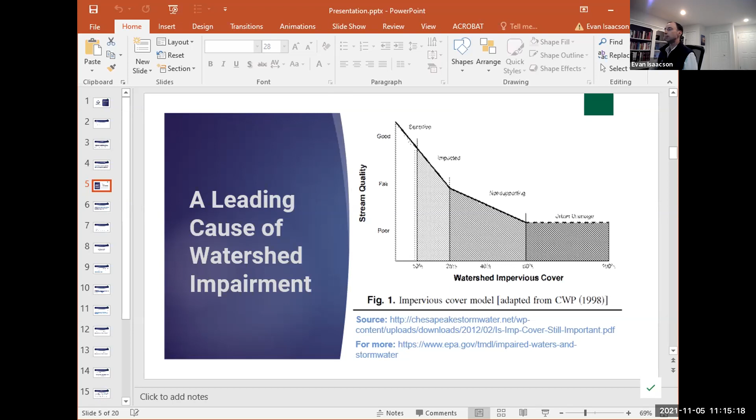And I do want to highly encourage you all to check out the Chesapeake Stormwater Network and Center for Watershed Protection websites. It's a wealth of resources, and the experts there, I'm sure, will be happy to answer any questions you have. They and others have really moved the ball forward on the science and engineering of stormwater management nationwide. But given that they're here in our backyard, I think that really probably helped push Maryland way ahead of many other states as far as inserting water pollution control policies into our MS4 permits.

All right, so I want to talk a little bit about why it's important to impose water quality protections in an MS4 permit. I'm not literally going to be talking about rebranding here. I'm not a marketing expert, but whether you say the acronym MS4, or you spell it out and say municipal separate storm sewer system permit, it's a mouthful and it's boring.

And I'm not even joking. My wife asks me to talk about stormwater when she needs help falling asleep.

We need to talk not so much about what a storm sewer system is or how it's being treated under the Clean Water Act. We need to talk about the impacts of stormwater itself, right? So it's not about a sewer system. It's about the fact that what comes out of that sewer system is completely untreated discharges of pollution. The fact that the impervious surfaces that convey that stormwater lead to flash flooding. The fact that the pollutants in that stormwater are toxic and expose the surrounding communities.

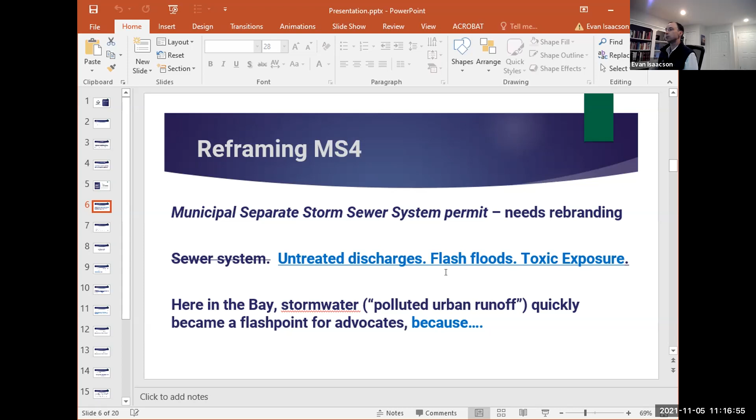So I think one of the lessons we in the Bay community have learned is that the word stormwater doesn't exactly resonate, and whether we rebrand with terms like polluted urban runoff or just think about some of the impacts of stormwater, that has actually helped catalyze focus. I would say stormwater is sort of the hot button issue as far as Bay restoration is concerned. And I'm going to talk in the next slide about why.

So climate change is inextricably linked with stormwater, at least in this region. I assume New Jersey is not very different from Maryland in that fact. Michael said he was jealous we have the Bay TMDL. I would say, don't be too jealous. The TMDL itself hasn't been all that successful. What has been successful and what is really important is that we have a federal appropriation every year for the Chesapeake Bay program, which is chock full of scientists, engineers, modelers, and experts on everything to do with the Chesapeake Bay. And I think in recent years that has really meant to some degree advanced analysis of the impacts of climate change.

Baltimore and Ellicott City in 2018, we saw catastrophic flooding. It made national news. The small town of Ellicott City, a historic town in central Maryland, was devastated by just a wall of water that rushed down the main street, destroying cars, and I believe it killed a few people. Those communities are still rebuilding, and importantly, they're not just rebuilding the way they were, they have received considerable state funds to sort of climate proof.

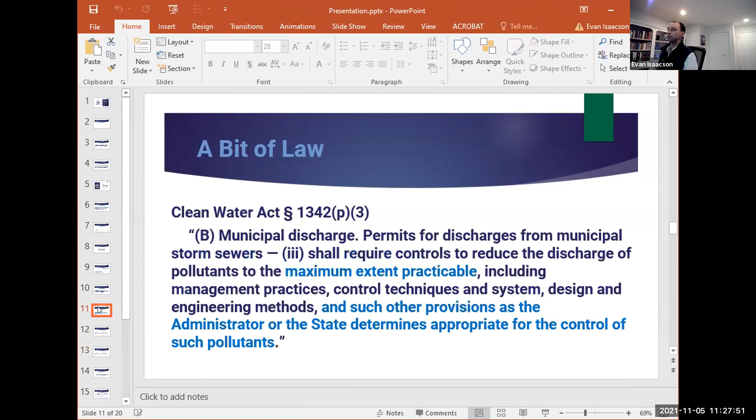So MEP controls this language, and then comma, and such other provisions. So the point here is this: MEP limits what a permitting authority can do, but it only includes those things. Then they also have the discretion, if they so choose, to include such other provisions as is determined appropriate for the control of such pollutants, right? So that is a more lenient standard that says a permitting authority has the discretion, if they so choose, to go beyond the maximum extent practicable.

There are entire journal articles about those commas and about that provision. There are numerous cases, as I mentioned, including 2 in California and 1 here in Maryland. There's actually been several here in Maryland. This is the most recent one. And yes, there are plenty of lawyers that are trying to figure this out.

The bottom line, and I'll end my legal discussion here, is could one compel, let's say an environmental group, could they compel a permitting authority in a state to write an MS4 permit that strictly complies with water quality standards? You know, I can't give a definitive answer and I wouldn't want to try, but based on the limited precedent, based on the arguments that I've seen to date, the answer is probably not. I certainly wouldn't have a lot of confidence in that. MEP acts as a legal ceiling, so you can't compel a state to go beyond MEP.

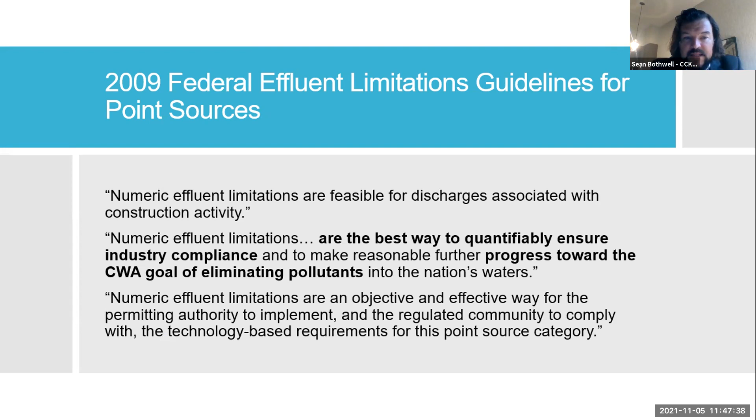And numeric limits aren't any type of new concept. You'll notice this is from 2009 guidelines. These were more focused on construction and industrial facilities, so they have to meet the BCT standard rather than what Evan was discussing, which is the maximum extent practicable. But it's 11 years now that this guidance has been out there, and very few numerics are being put into permits. And again, since 2010, EPA has been advocating and pushing for local permitting authorities to use numeric limits when it's feasible, because it holds people accountable. People know when they're exceeding standards and when they're not.

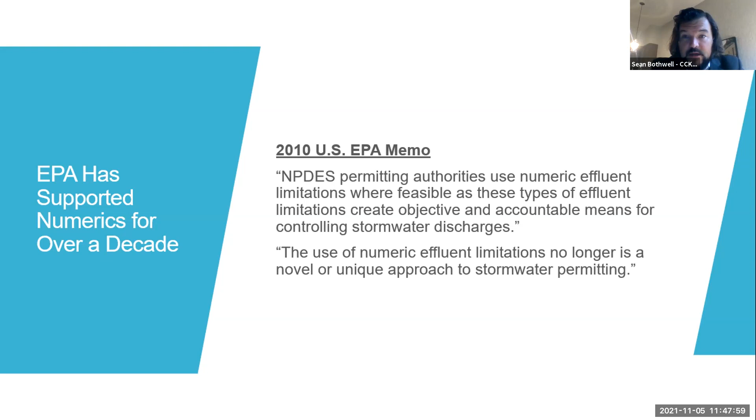So I'm going to get into the 4 case studies now, and I'm going to start with some of the better ones and then move towards some of the TMDL incorporations that aren't really working as well, and it'll hopefully elucidate some best practices, but also some lessons learned as we go through it.

So the industrial stormwater permit was reissued in 2015 in California, but then revised in 2018 to incorporate our TMDLs in California. And we negotiated pretty heavily with the state to get these TMDLs. Most of our TMDLs in California are in Los Angeles, but there are a few in Orange County, which is south of LA, and San Diego, which is again further south. But all these TMDLs have been incorporated into the permit as numeric effluent limits. And someone can correct me if I'm wrong, but my understanding is it's the first time a stormwater permit incorporated numeric limits into the permit itself.

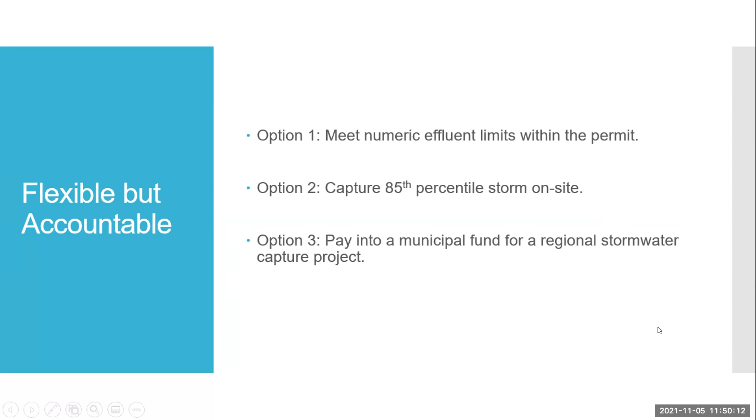So Sean, yeah, Mike. Sorry, you're coming in and out sound-wise, so I don't know if you can sort of lean in just a bit more. Sorry about that. I apologize. I'm actually in a hotel room, so it might be the bandwidth Wi-Fi here. Let me know if it's still a problem. I'll try to talk closer to the computer.

So we negotiated three flexible options under the industrial permit. The first is pretty simple, just meet your numeric standards. However you need to do that, whatever BMPs you need to implement, you need to meet your numeric standards in your permit. No one really wants to do that, right? And a lot of people just don't think it's even feasible. So we provided two other options.

The second option is to build a stormwater capture unit on your property, capturing stormwater to the 85th percentile. And we're trying to push for a higher standard than 85th percentile, but we did do some modeling, and the state did some modeling around this, and found that for the most part, 85th percentile does capture the pollutants necessary to meet the numeric standards that are in the permit. So it wasn't perfect. This is kind of where we compromised, but it captured quite a bit to the point where we were comfortable allowing that to go forward as a compliance option.

And then the third option is for the industrial facility to pay into a regional stormwater project, pay the municipality, and they would take on the liability of the stormwater, but they would build a regional stormwater capture project. And that's helpful for a couple of reasons. One, if the industrial person doesn't meet their standards, the municipality is going to be liable as that runoff runs into their MS4 system. And two, at least in California, we have a constitutional provision that really prevents municipalities from raising a stormwater utility fee. And so this was a creative option to give funding to municipalities to help with their liability, but to also help with funding these stormwater projects.

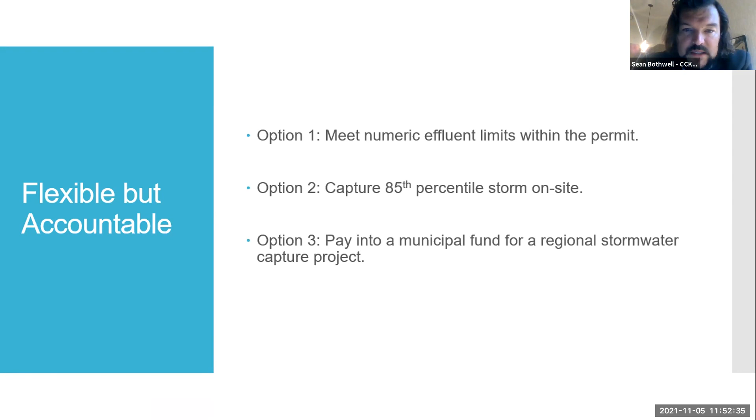So that was the industrial permit. And I would say that's probably been one of our more successful permits because again, it holds folks accountable. They either have to meet their numeric standards, they have to build a stormwater capture to the 85th percentile, or they have to pay into the fund. And when you pay into that fund, the liability doesn't just go away. The liability goes to the municipality.

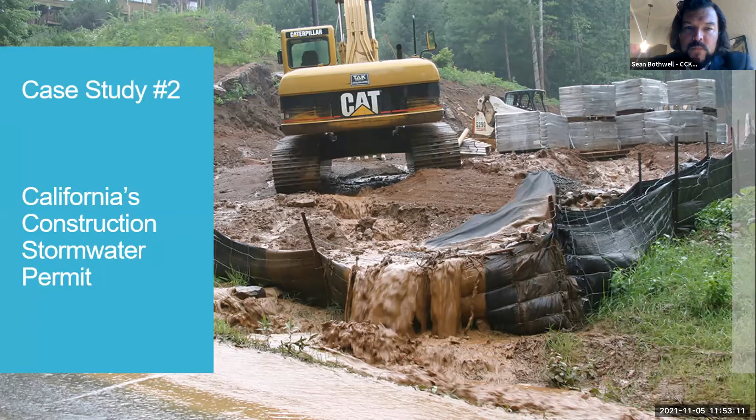So the second case study is one that we're actually currently working on right now, which is the construction stormwater permit. This is the history of us actually fighting for numeric standards in the permit. The first construction permit was adopted in 1999, and it had narrative standards. And then in 2006, California had a blue ribbon panel that looked at the feasibility of numerics. Again, this was focused on just construction and industrial permits.

It also wasn't looking at water quality-based standards. It was looking at technology-based standards, so the BAT, BCT standard that industrial and construction folks had. So the idea was you needed to look at BMPs and see what numerics were feasible based on the BMPs' effectiveness. But the Blue Ribbon panel found that that was something that could be determined through BMP data.

So in 2009, the State Water Board adopted construction permits with numerics in them. So I guess technically these were the first with numerics in there, but they were taken out for turbidity and pH. Our construction industry sued the State Water Board and won. And ironically, they won on a similar argument that we had made. We had made the comment that you can't just pick a number out of thin air. It needs to be based on BMP effectiveness and what is really feasible with the BMPs.

And instead of listening to us, we were trying to get more stringent numerics, the State Water Board just picked numbers. And so the building trades folks sued the State Water Board and said, you can't do that. You can't just pull numbers out of thin air, which is exactly what we said. And the court agreed. So they pulled out the numerics. We made the argument that they just needed to adjust them, but the State Water Board felt it was easier to just pull them out altogether. So unfortunately, we didn't have TMDL standards for pH or turbidity. We just had nothing. There wasn't even a narrative standard because they just took it out.

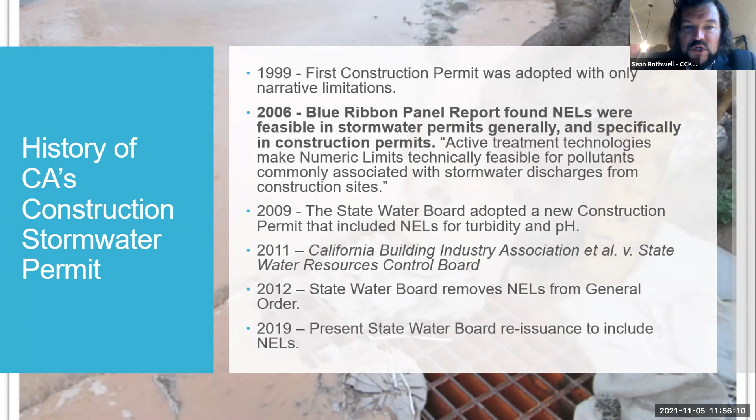Basically what they did was they looked at what we did in the industrial permit and said the TMDL and the waste load allocation is written the exact same way for the industrial folks and the construction folks. So their effluent limits should be the same. We've already translated them for industrial. The construction folks need to meet the same standards. So that's the fight we're having now. Right now it's more of a political issue than a legal or technical one. But we're hoping that the permit will be adopted next year with numerics similar to what's in the industrial permit.

So the third study is the Los Angeles municipal study, and the next one's going to be municipal as well, because I know part of the attention of this panel is more municipal stormwater. I don't work on local permits, but this permit really drives the rest of the state. A lot of the permits and policies that we have start in Los Angeles. So I think it's an important permit to review. So Los Angeles did something fairly innovative, and they did it to encourage stormwater capture, but also, again, to shield polluters, to take away the accountability that should be provided in TMDLs.

NRDC and our LA Waterkeeper brought some enforcement action against some folks in Los Angeles, and they didn't like that very much. And so they worked for several years to find a way to shield them from citizen suit enforcement going forward. And so the innovative approach was, instead of a pollutant load permit, so whatever grams for metals or whatever the load was, instead of holding them accountable per load of pollutant, they're now regulated more on volume capture. So how much stormwater are you capturing rather than discharging into our waterways or our ocean?

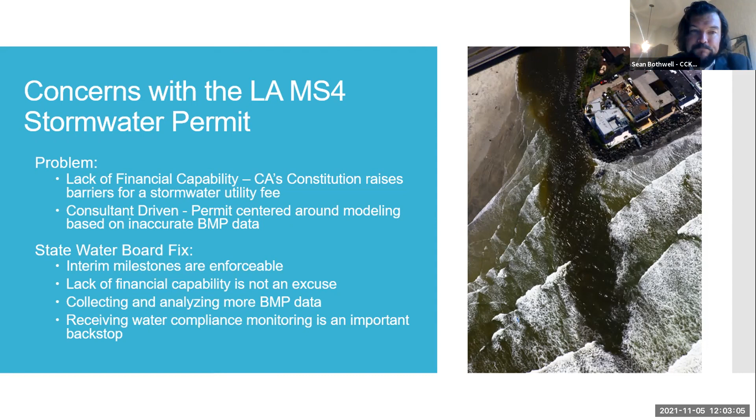The last case study I'll go over is what is called our Caltrans stormwater permit, but basically it's all of our freeways here in California. Like the Los Angeles permit, it is a municipal stormwater permit, so they're under the MEP standard as well. And this is one where they started off actually really bad, and we're moving towards fixing some of our mistakes. So Caltrans actually has 84 TMDLs under them, and they own a lot of property. It's very linear, so they're touching on a lot of areas that have a lot of TMDLs here in California.

In 2012, they incorporated the TMDLs and they tried to come up with this creative compliance unit approach. It's kind of like credit trading, but not exactly. The State Water Board did a lot of modeling and a lot of calculations to figure out how many acres of land they're responsible for cleaning up in order to meet their waste load allocations and their effluent limits. And so they looked at how many acres a unit, gave them 20 years, and came up with this just random number of 1,650 compliance units.

And so basically every year they have to achieve this amount of compliance units. They either need to treat 1 acre, which equals 1 compliance unit, or they need to pay into this cooperative program. So they would basically pay the municipality to do some type of BMP, stormwater capture, whatever the BMP implementation is, in order to start moving towards waste load achievements.